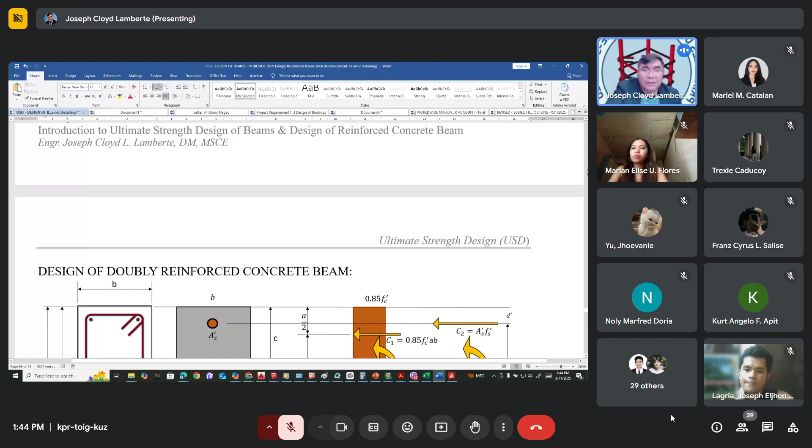So this is the moment due to load, the ultimate moment due to load.

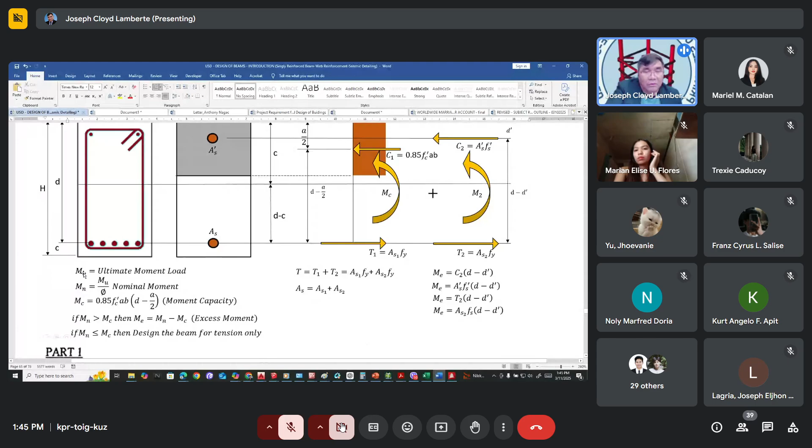So the ultimate moment is the reduced nominal moment. We get the nominal moment so that it can be compared to the moment capacity, without the reduction factor. So correcting what was wrong last time: excess moment is equal to

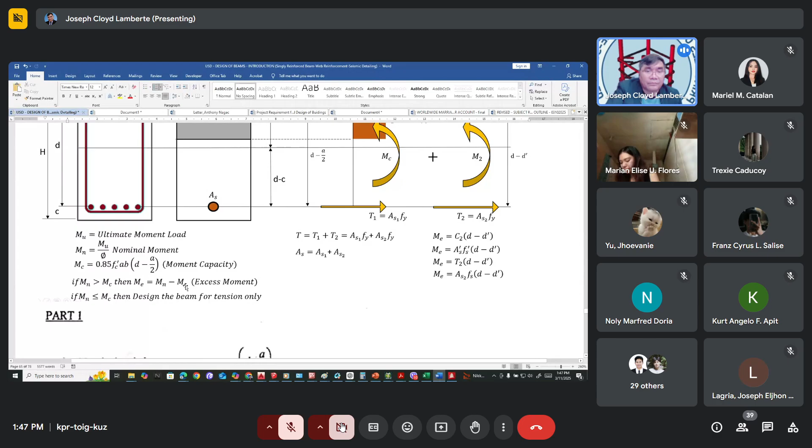Okay, so let's proceed to the problem.

Design a rectangular beam to carry a maximum design moment of 272 kilonewton meter. This is already including its own weight. The beam is limited to a cross-section of 300 by 420 mm.

Use FC prime 20.7 and FY 400 megapascal. Steel covering of 70mm, and for top and bottom, 36mm main bars.

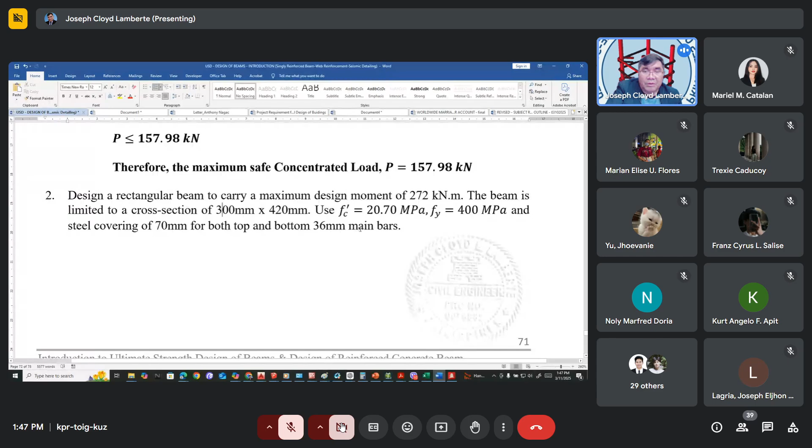So, 300 by 420, yes that's the covering, 70 for all. So first we need to determine, given our moment load,

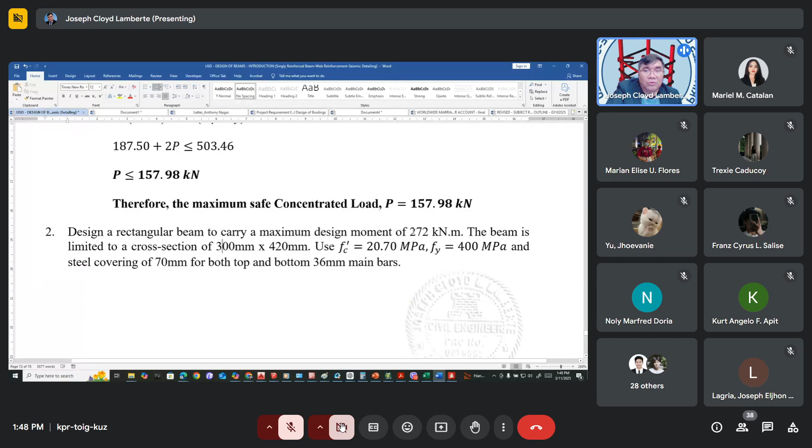moment load of 272 kilonewton meter. So we need to determine the nominal moment, nominal design moment at tension controlled condition, so we can use the reduction factor of 0.9.

Or else, if it's not tension controlled condition, we can't use 0.9. So Mu is equal to the reduced nominal moment.

So we get the nominal moment equal to Mu over reduction factor. We have the nominal moment equal to 302.2 kilonewton meter.

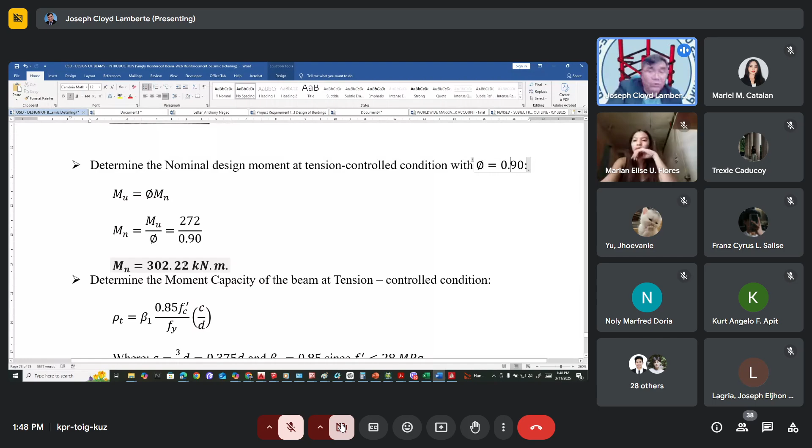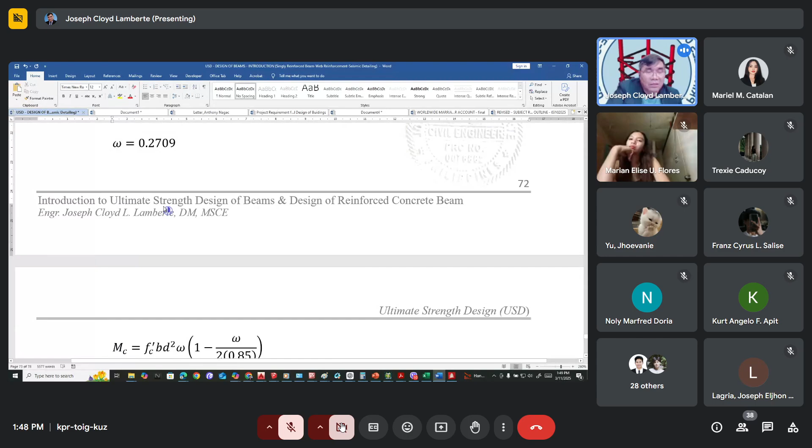Now, I also showed that this calculation is based on this equation, the one I introduced earlier. Although it's the same equation, the same calculation as before.

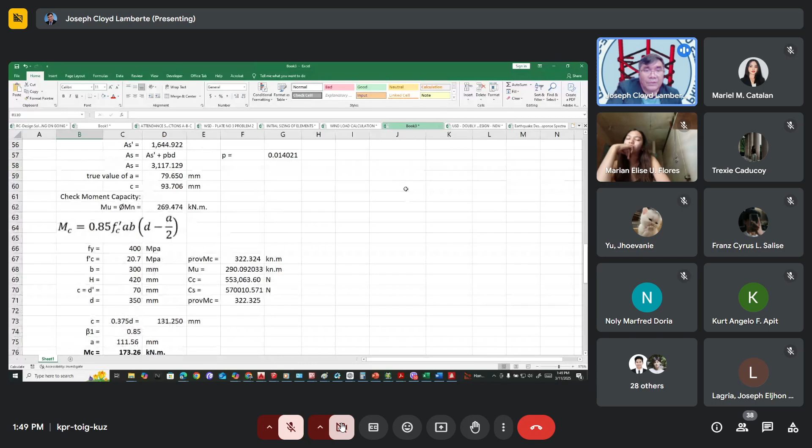The same calculation actually.

Okay, going back to what I introduced in the first slide: Mc is 0.85 FC prime, ab times (d minus a over 2). Although this equation is only taken from that one.

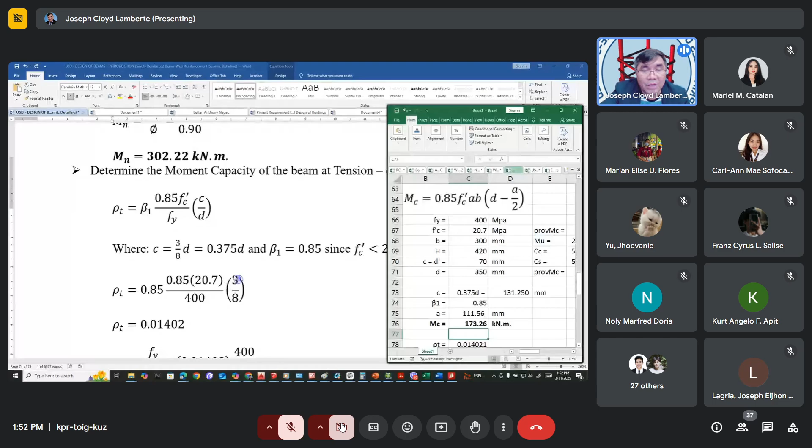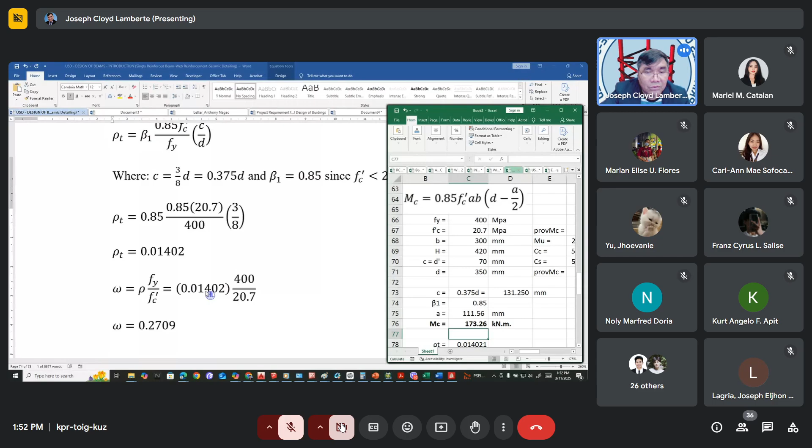Knowing our steel ratio, we get W. So W is steel ratio times Fy over FC prime. We substitute it there, and we get W as 0.2709.

So we apply this value also. FC prime 20.7, B is 300, D we already have complete. W is given as 0.2709.

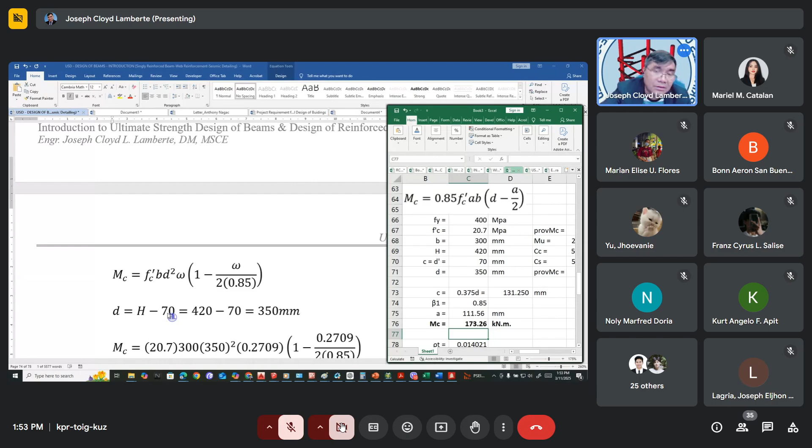So D is already solved. D is H minus 70, so 420 minus 70 is 350. So we get the value: 20.7, 300, 350 squared, 0.2709.

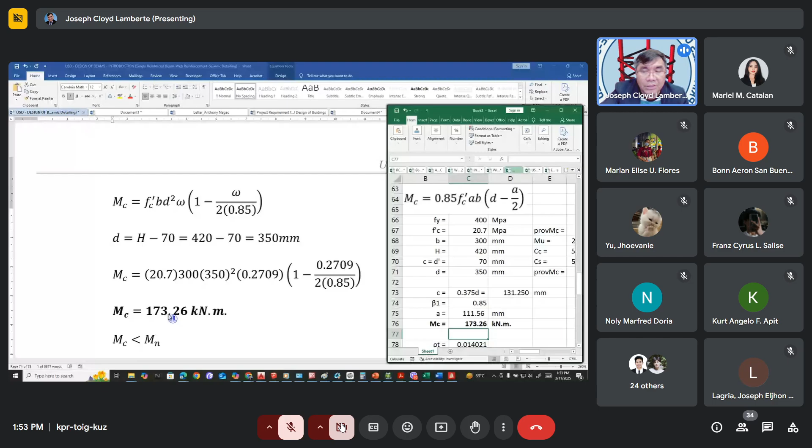Times 1 minus W over 2 times 0.85. So 2 times 0.85, that becomes 0.59W. Calculating this will give us the same value, 173.26. They are the same, because the formula is the same.

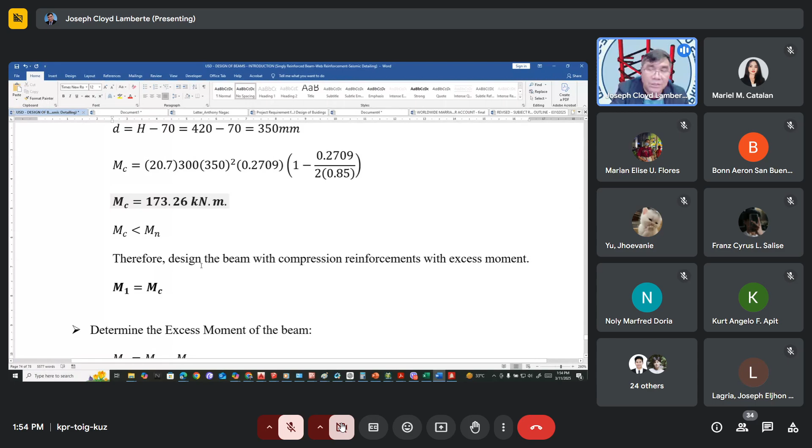Knowing MC, since MC is less than the nominal moment of 302, therefore we design the beam with compression reinforcement with excess moment. So let M1 be our MC now, from the moment capacity due to concrete.

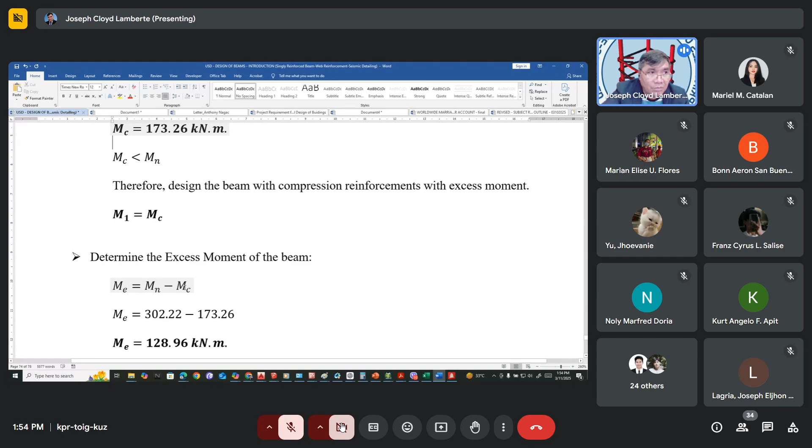Then we determine the excess moment of the beam. The excess moment of the beam is the nominal moment minus MC, or the nominal moment minus the moment capacity. So 302.22 minus 173.26, so the excess moment is 128.96. And then we let M2 equal our ME, or the excess moment.

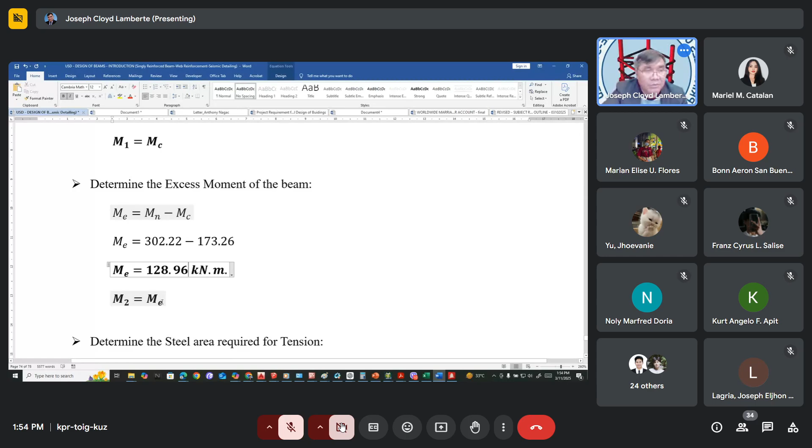Next we will determine the steel area required for tension. So the steel area required for tension has both part 1 and part 2. AS is equal to AS1, taken from part 1, plus AS2, taken from part 2.

So from part 1, M1 is equal to AS1 times Fy times D minus A over 2. Where is this derived from? It's derived from here, from this moment, M1. So AS1 times Fy times the lever arm, D minus A over 2.

AS1 Fy D minus A over 2. That uses Fy because it's on the tension side, and we idealize it to achieve tension control condition.

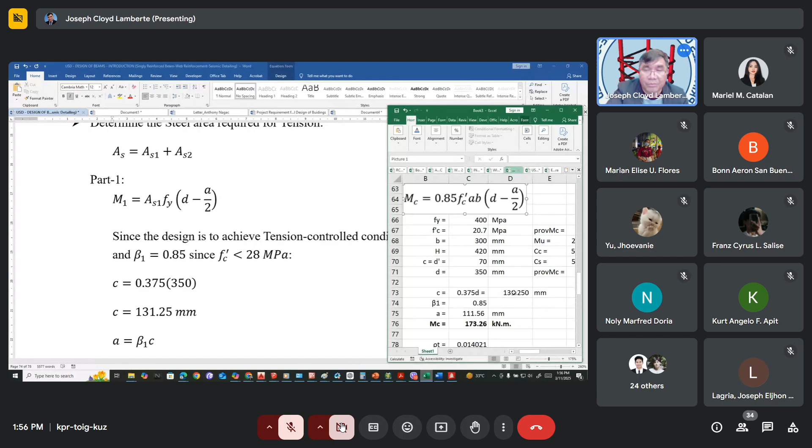Since the design is to achieve tension control condition, with C as 3/8 D or 0.375D, we get C as 0.375 times 350. So we have C as 131.25, same as before. Then A is beta 1 C, where beta 1 is 0.85.

So our A is 111.563, same as before. So from our equation, M1 is AS1 Fy times D minus A over 2.

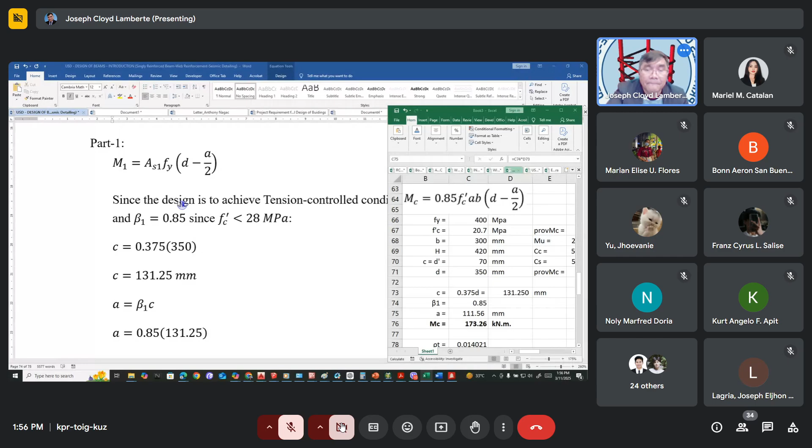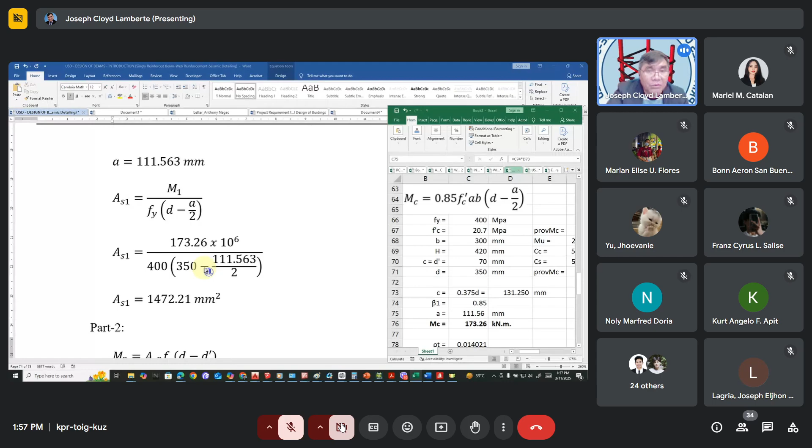We get AS1 from this. So AS1 is M1 over Fy times D minus A over 2. M1 is 173.26 times 10 to the 6, over 400, depth is 350 minus A over 2. So we get AS1 as 1472.21 square millimeter.

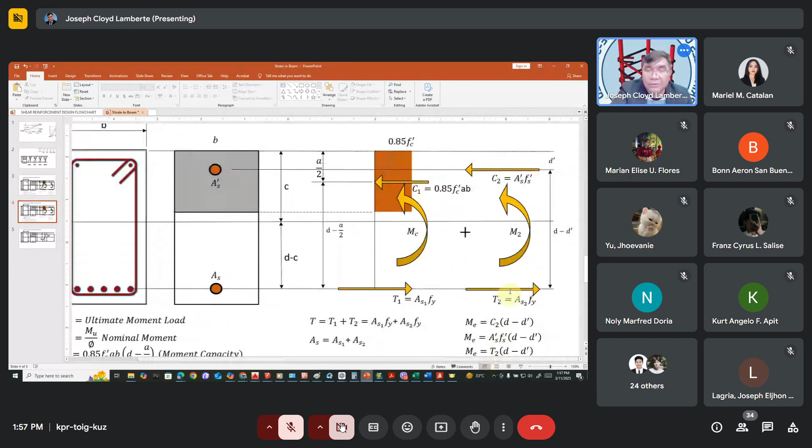On M2, part 2 is to determine AS2. Where is it derived from? It's from M2, applied to tension as AS2. So AS2 times Fy times the lever arm, D minus D prime.

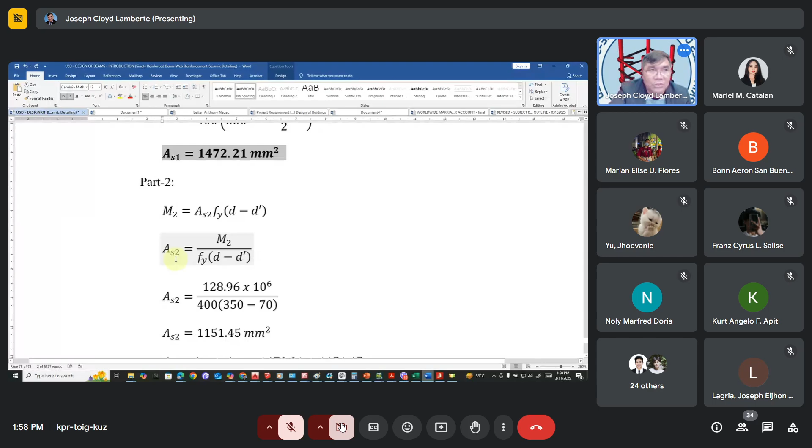So muna AS2 equals M2 over Fy times D minus D prime. We have M2 equals 128.96 times 10 to the 6, Fy is 400, D minus D prime is 350 minus 70. It will give us 1,151.45 square millimeter for AS2.

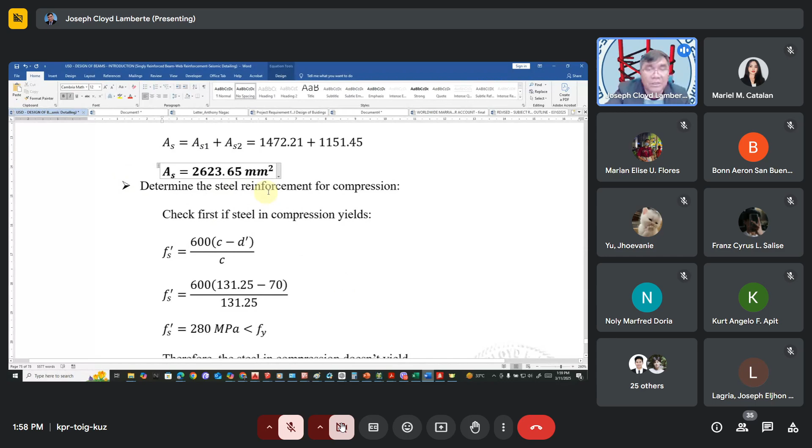This is the total AS, or as some call it, AS no. 1472.21 plus 1151.45 gives us a total of 2,623.65 square millimeter. Next is the compression side, to determine the steel reinforcement for compression.

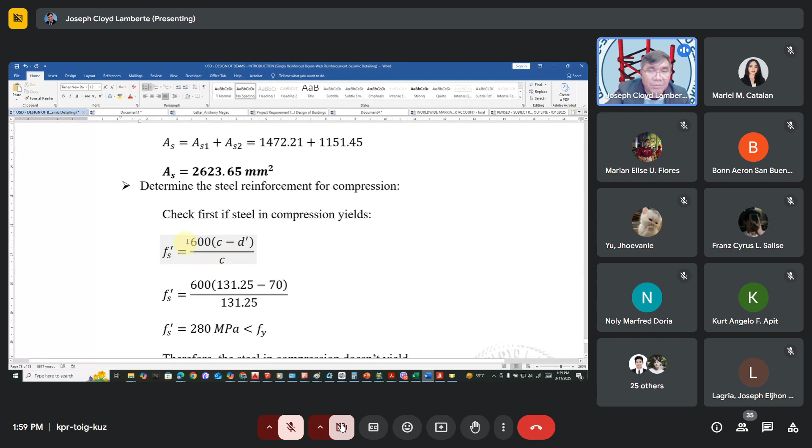But first we need to check if the compression steel yields, or if the steel in compression yields. So this is where we get FS prime. FS prime is taken from here, let me just copy this, it's generic.

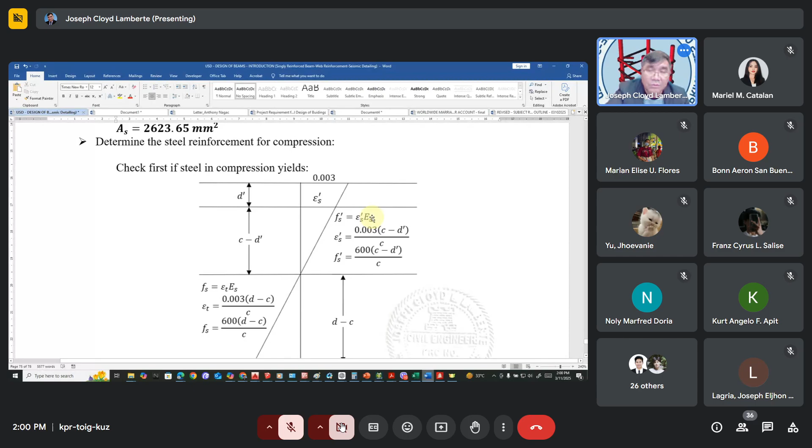This becomes 600 times C minus D prime over C. So we check FS prime, which is 600 times C minus D prime over C. Now, FS prime is only 280, less than FY. Therefore, our steel in compression does not yield, so we will use the actual value of 280 megapascal.

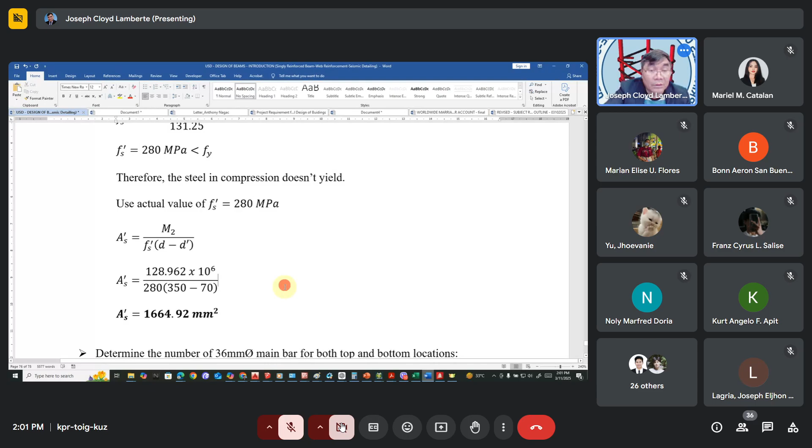So AS prime equals M2 over FS prime times D minus D prime. The M2 is 128.962 times 10 to the 6. We use 280 as the actual value, and 350 minus 70. This gives us AS prime equal to 1664.92 square millimeter.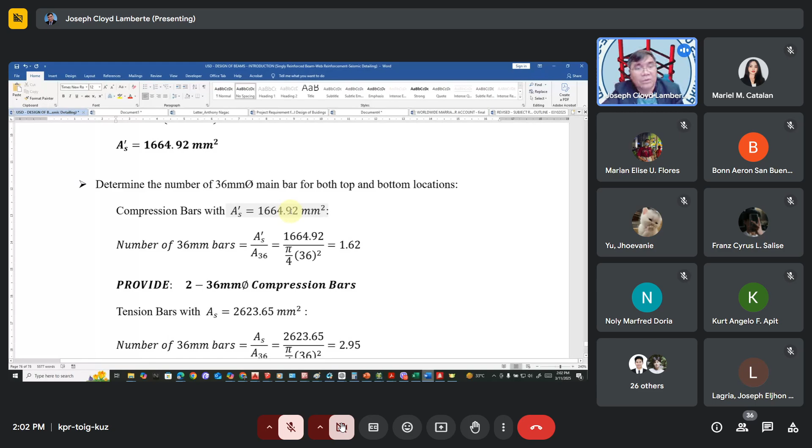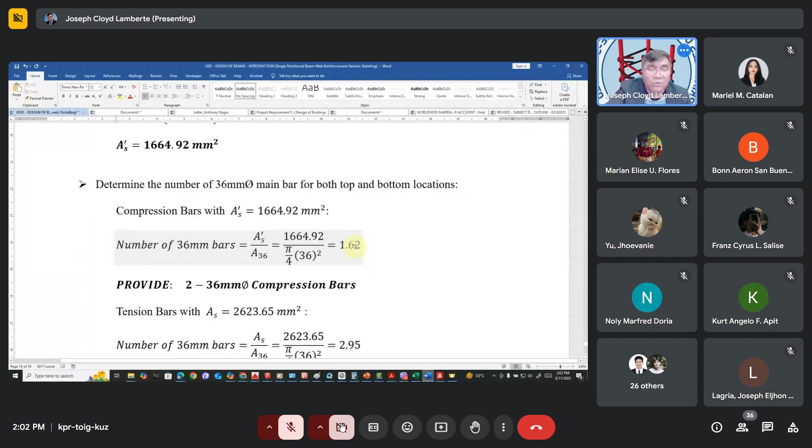Next is to determine the number of 36 mm diameter bars for both top and bottom locations. For compression bars with AS prime 1664.92, we get the number of 36 mm bars by dividing the total area AS prime by the area of one 36 mm bar. This gives 1.62, so therefore provide two 36 mm diameter compression bars.

Then for tension bars with AS equal to 2623.65 square millimeter, the number of bars is AS over the area of one 36 mm bar. We get 2.95, so provide three 36 mm diameter tension bars.

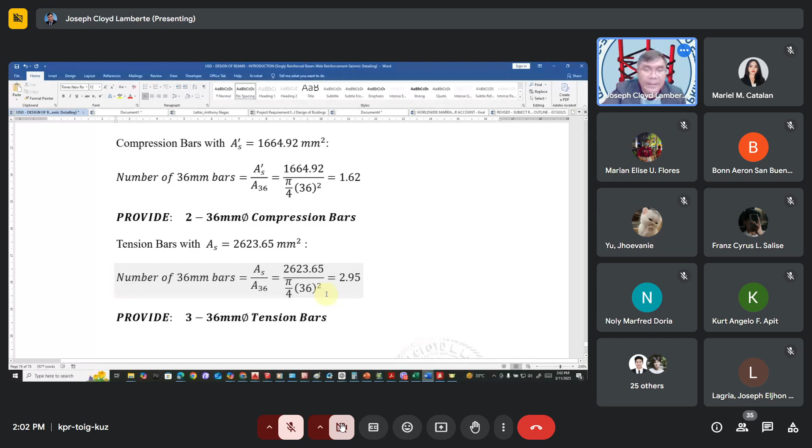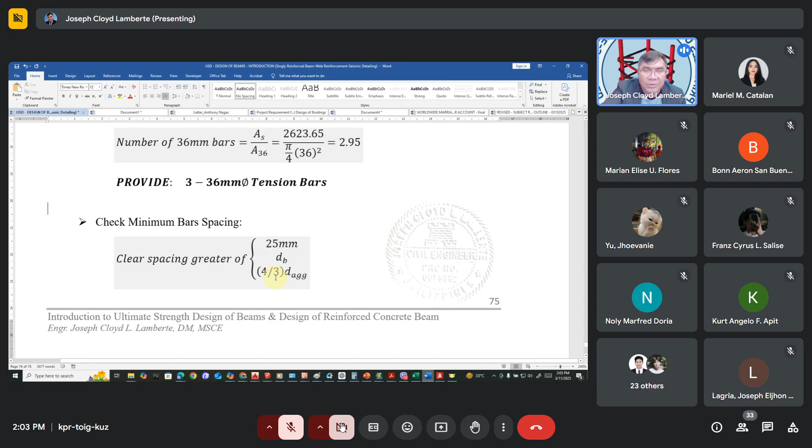Now we want to check the minimum bar spacing, with the clear spacing requirement, which is the greater of 25 mm, the diameter of the bar, or 4/3 the diameter of the aggregate. Assuming this is 20 mm aggregate size, we have 25 mm, the diameter of bar is 36 mm, and 26.67 or 27 mm.

So the governing minimum spacing is the 36 mm. Provided spacing is the width minus two times concrete cover minus two times stirrup minus the number of bars times the bar diameter, over number of bars minus 1.

In this case, we will provide 12 mm diameter stirrup size, because the main bar is greater than 32 mm. Do you understand, class? Yes, sir, yes, sir.

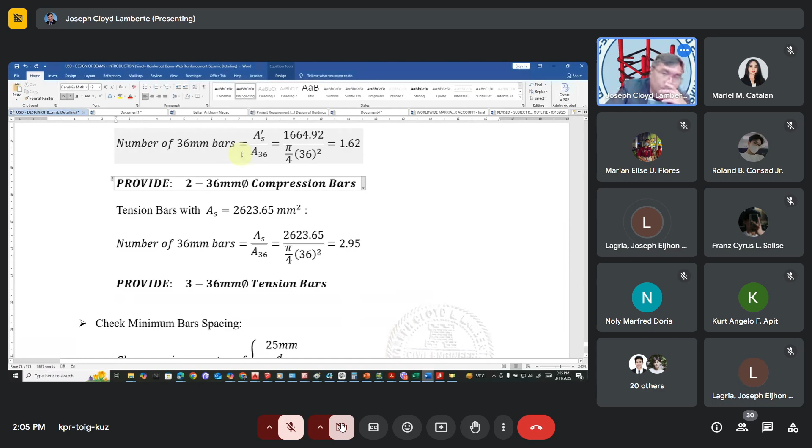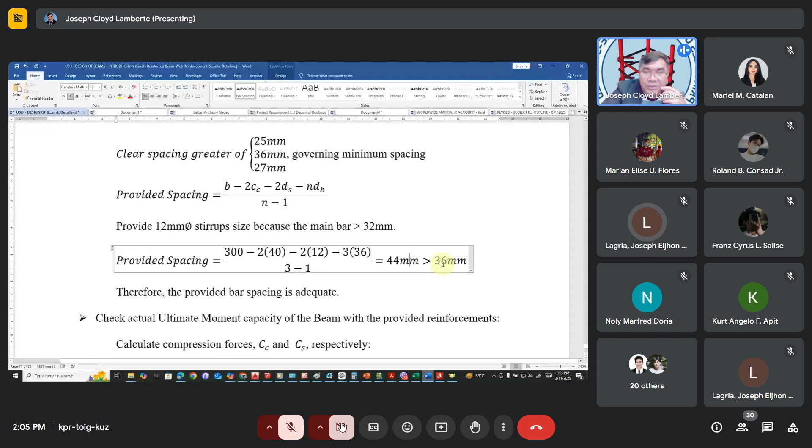Yes sir. So minus 3 ka 36mm divided by 3 minus 1. So we will have a spacing of 44mm, which is greater than the governing minimum spacing of 36mm. So therefore, the provided bar spacing is adequate.

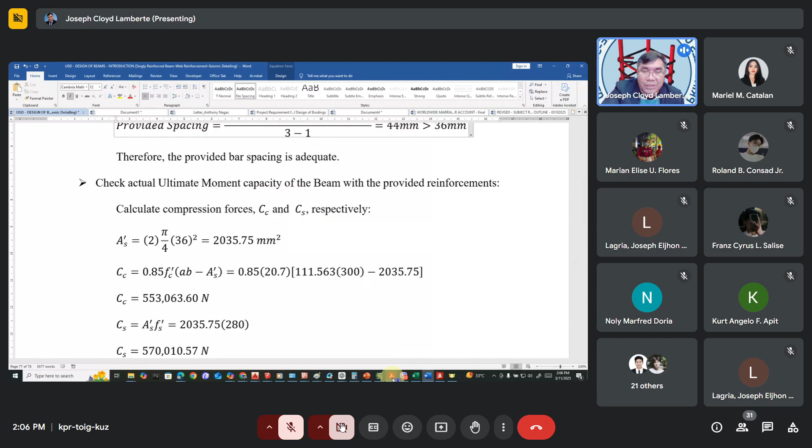Now check actual ultimate moment capacity with the provided reinforcement. So calculating the compression forces C sub C and C sub S respectively. C sub C is the compression due to concrete, C sub S is the compression due to steel. C sub 1 din is C sub C. C sub C or C sub 1 is the compression due to concrete, and C sub 2 is C sub S, compression due to the steel.

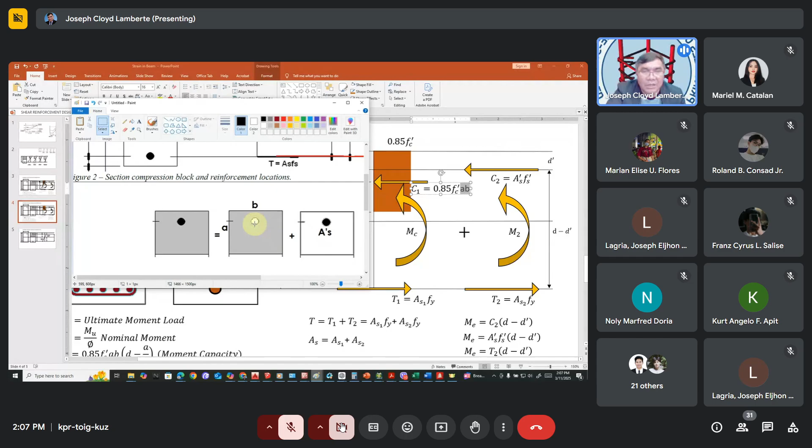Kulangan ni siya class, dapat ni siya. So yung ani na siya class eh, yung ani siya. Kanina to yung total compression. Ang kanang gray is mo na yung concrete, ang itom is mo na yung steel. So ang area ng gray is AB minus yung AS prime. AS prime, yung gitanggal diya, nabangag man siya. So AB din na siya minus AS prime.

AB, minus AS prime. I need to correct ini, I need to correct.

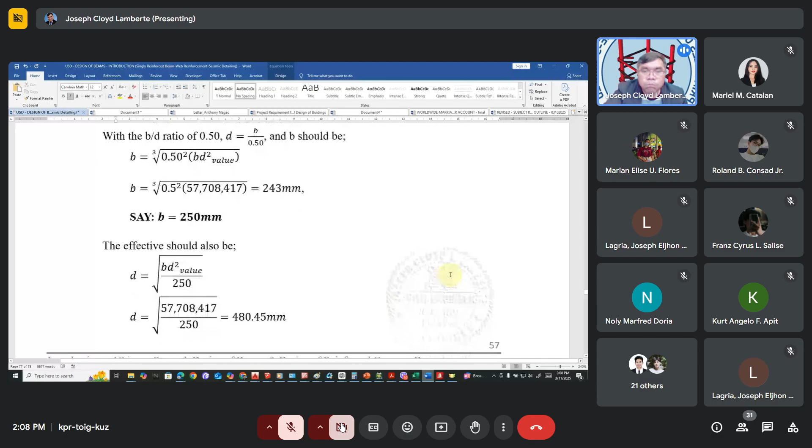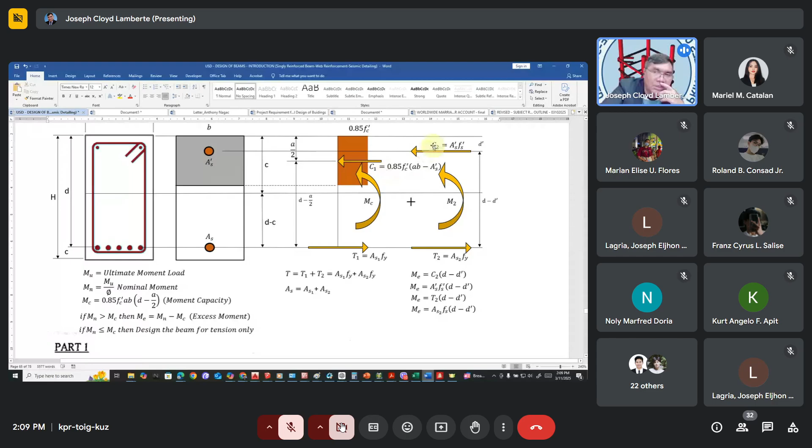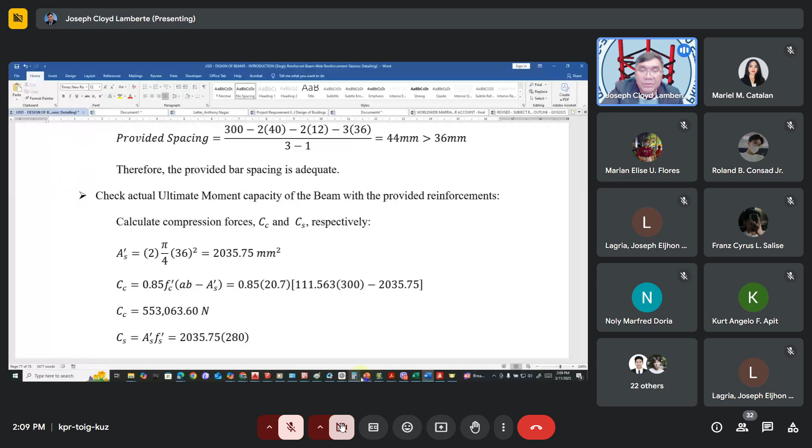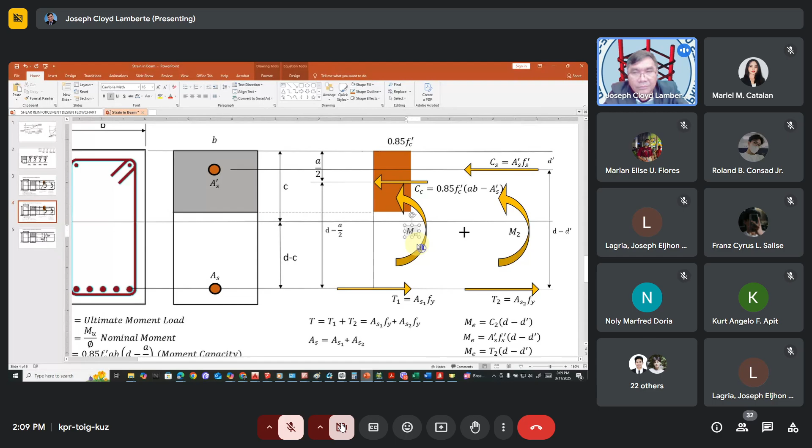So C1, C1 is C sub C, C2 is C sub S. So C sub C or C sub S, may pag C sub C o C sub S ang gamit? C sub C o C sub S, ano talaga? C sub C o C sub S. Pero 1 and 2 na mura kayo gamit ko, M1 and 2. Sige lang, C sub S. Kanina lang kay M1.

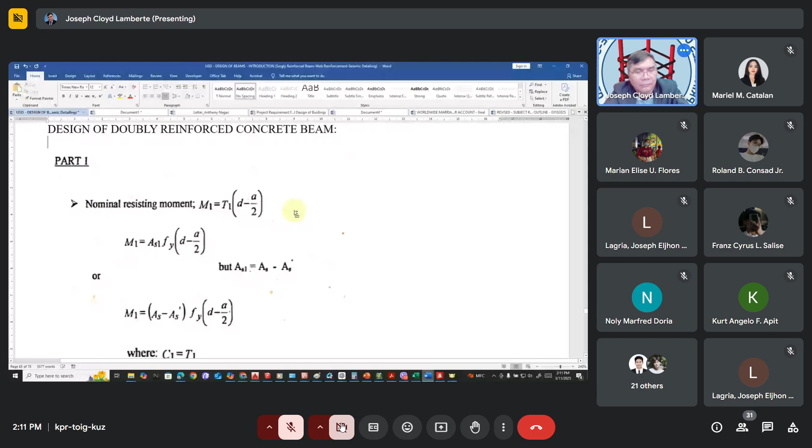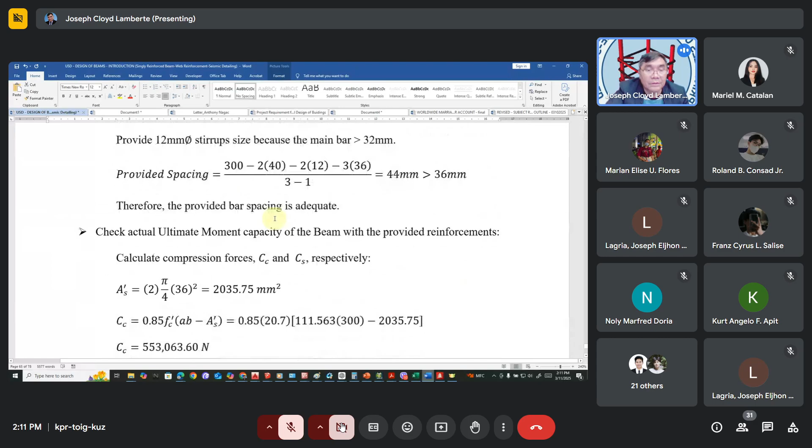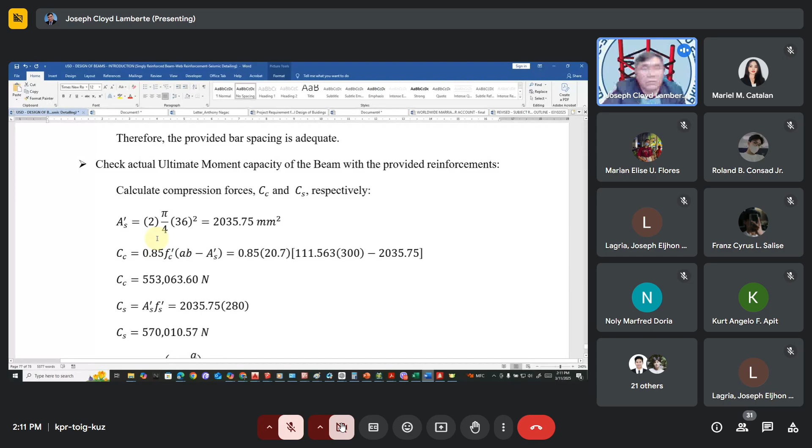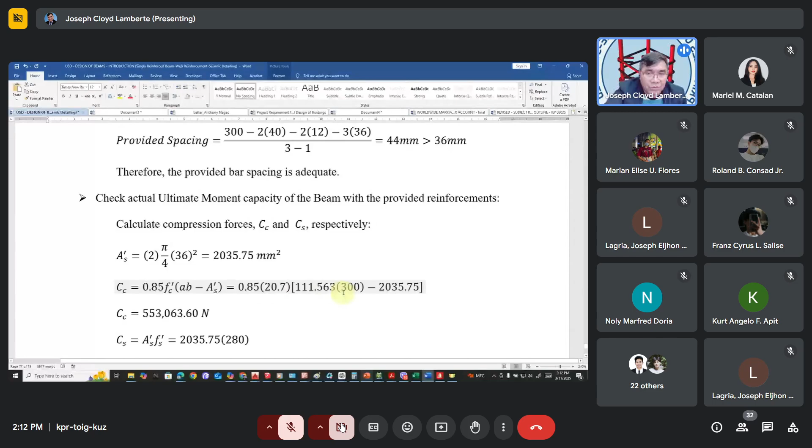So yun to, C sub C and C sub S respectively. Kung ano sa nato si AS prime, kaya magamit na nato si AS prime, kaya AS prime bios, compression C sub C o C sub S. So si AS prime is only 2 cut 36mm, so 2035.75 squared. So C sub C is 0.85 FC prime times, ang area, net area is AB minus AS prime. So applying values, we will have C sub C is 553,063.6 Newton.

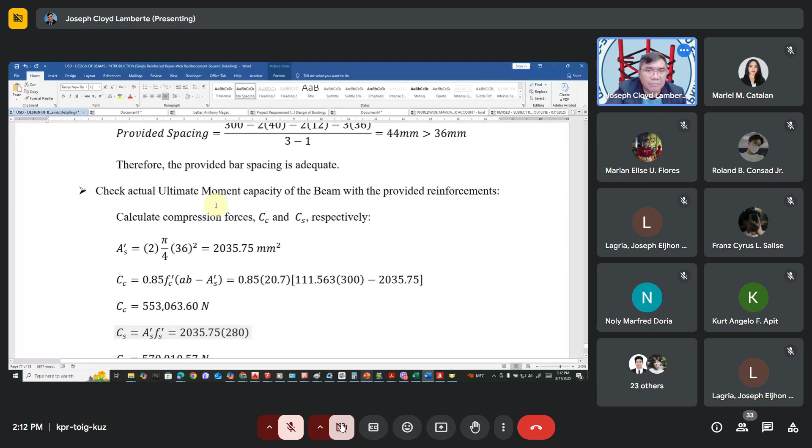What about C sub S? AS prime, so 2035.75 times 280 nga FS prime. So 570,010.57 Newton. So atong i-calculate ang nominal moment capacity.

Nominal moment capacity. So actual nga nominal moment. So C sub C times the lever arm D minus A over 2, plus C sub S times the lever arm D minus D prime. So applying values: 553,000 times 350 minus A over 2, plus 570,000 times 350 minus 70. So total divided by the proper units, it will give us a moment capacity of 322.325 kilonewton meter.

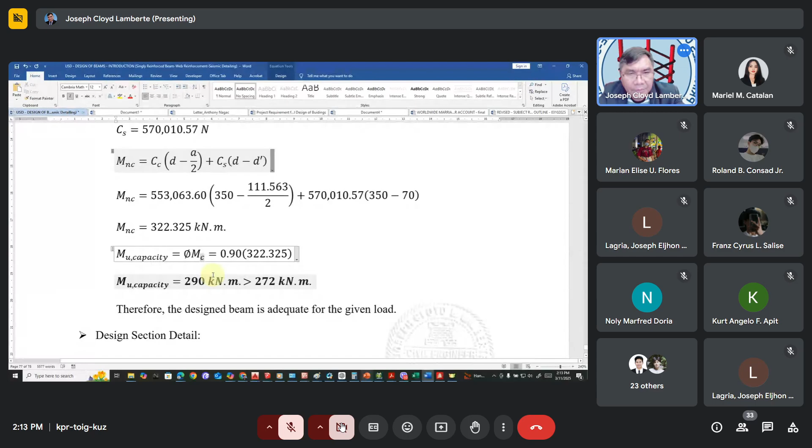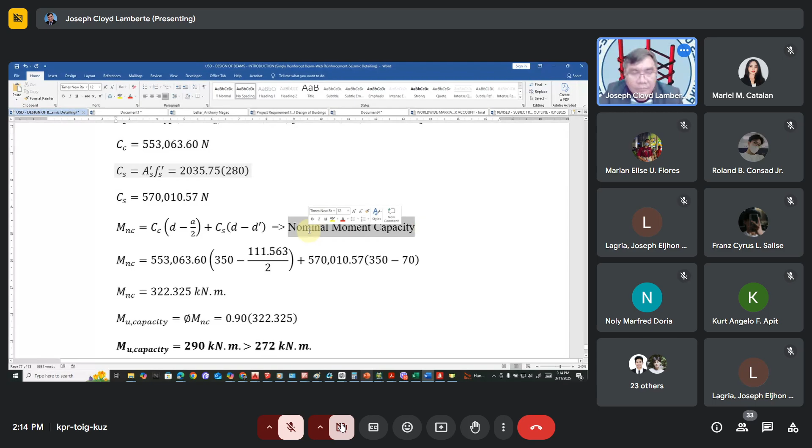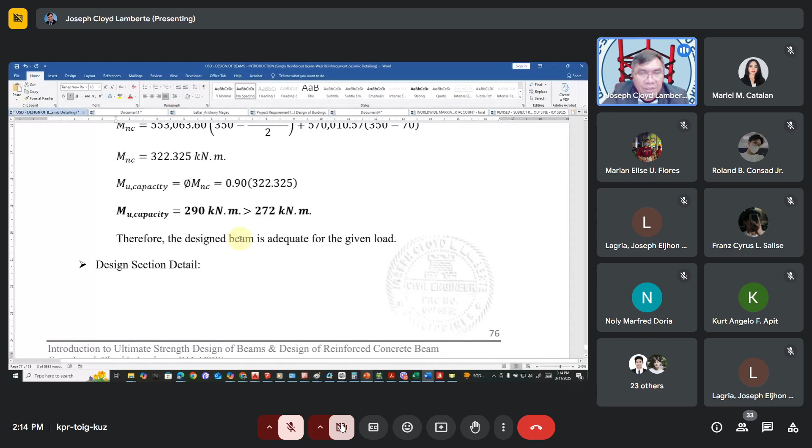So kung sa ano siyang ultimate moment capacity? The nominal moment capacity. So tingnan ko ang MU. MU capacity, the reduced moment, reduced nominal moment. So unsa ni si MN? According niini si ultimate moment capacity is equal to the reduced nominal moment capacity. So 0.9 times 322.325. So the ultimate moment capacity is 290 kilonewton, which is greater than 272 nga ultimate load moment. Therefore, the design beam is adequate for the given load.

So design section detail is 1A. Sabtan class? Yes sir. Question class.